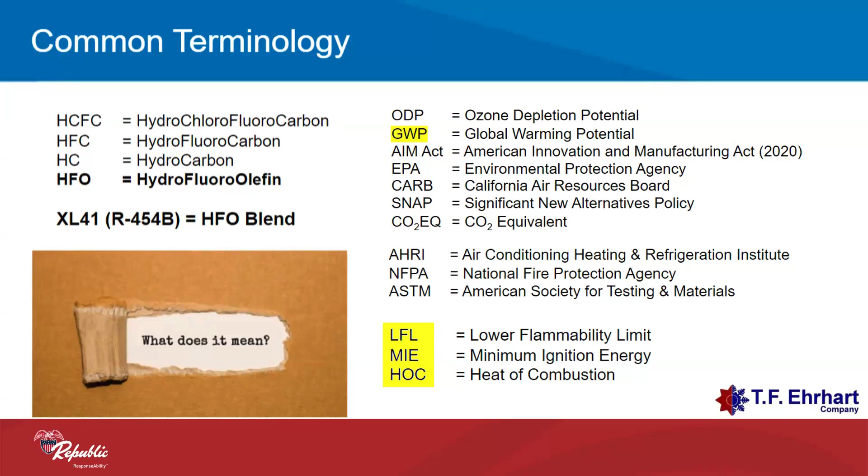But the global warming potential is what we need to keep talking about, and we'll talk about ozone depletion in a minute. But the other three down there at the bottom right, lower flammability limit, minimum ignition energy, and heat of combustion, are pretty important factors. We'll talk in more detail in a minute about those three. But those are the three factors that we really look at in terms of how flammable our low flammable refrigerants, or A2Ls, are. And I'll share with you some of those numbers, and that it's going to be more of a factor as we move forward here.

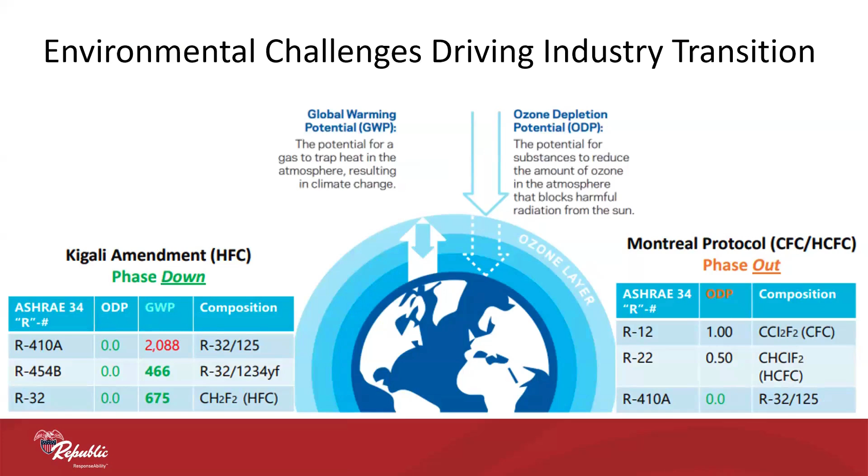So back in the 90s, we brought on 410A to reduce ozone depletion, or ODP. That's why we got into 410A to begin with. And good news is the ozone layer is doing much better now. So we solved that problem, but we increased another problem, and that's global warming. And as you can see, 410A has a global warming potential of 2088. And essentially what that means is putting more carbon into the atmosphere, and that carbon takes a long time to break down. And if you put that into years, well, I'll show you a slide in a minute that goes through that. But what we're doing is three different phases.

First is bulk phase down. So we're reducing the amount of 410A that we're making. Technology transition just happened. Manufacturers, as of January 1, cannot make residential light commercial AC and heat pumps or chillers as of January 2025. So we now have to start making them with the lower GWP products. VRF has another year on top of that. So we are a little easier on the VRF side, but everything else is now being manufactured with 454B refrigerant in terms of JCI and Bosch products.

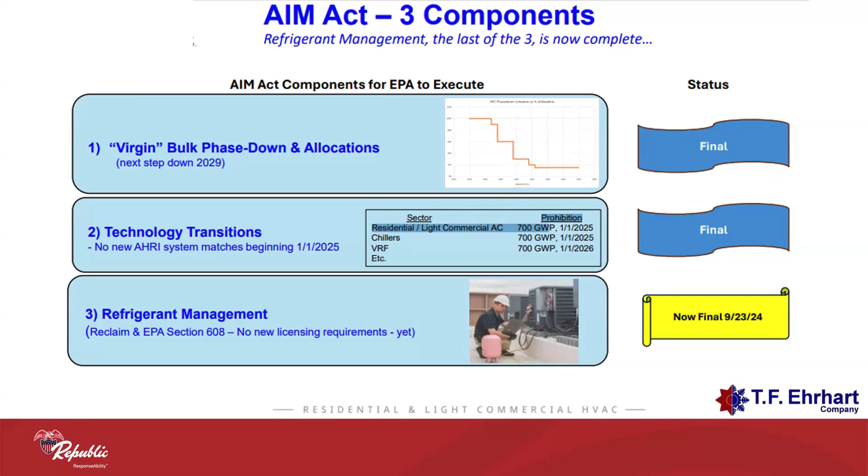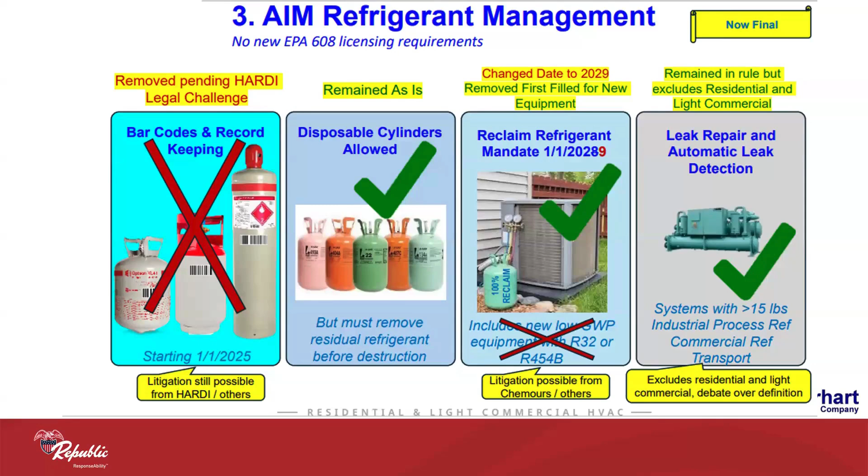Refrigerant management. That's now final, and you shouldn't see any major changes in that for a few years, but the policy is now final. So we're not going to go into great detail now, but as we get closer to it, we'll talk about what that means. The barcoding and record keeping isn't going to happen. We were able to fight that in Congress and got that down. Disposable cylinders will still be allowed. The reclaim mandate's been pushed out to 2029, so that one's a little more clear and still not quite done. And then leak repair detection is coming as well.

Storing in vans for non-refillable cylinders: disposable or non-refillable cylinders, angled like this with the pressure valve facing up, is fine. Again, the pressure valves in the old 410A systems were burst valves, so they just burst and release the pressure and you didn't have anything else happen. These valves just burp the refrigerant out slowly to equalize the pressure. And if they're facing down, they're going to burp the liquid out. And the flammable liquid in your van is not a good thing. So if you store them upright like this, there's always a little vapor section at the top, and it will burp that vapor, so you don't have the liquid refrigerant.

The recovery cylinders, on the other hand, have a valve right in the center at the top, so it's almost impossible to ensure that you don't have some liquid resting upon that valve. So those do need to be stored upright. Of course, if they're empty, they could be stored otherwise, but like anything else in a service van, it's best to have a plan and always have everything in its place when you're moving. So I'd recommend figuring out how you're going to store those upright.

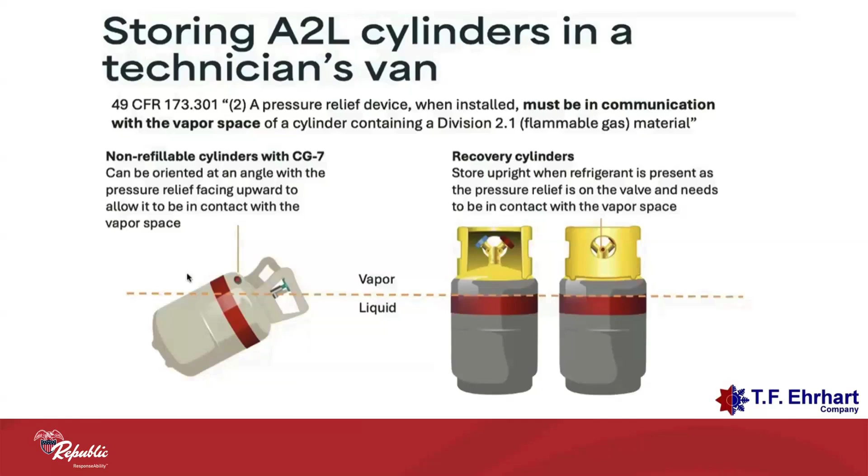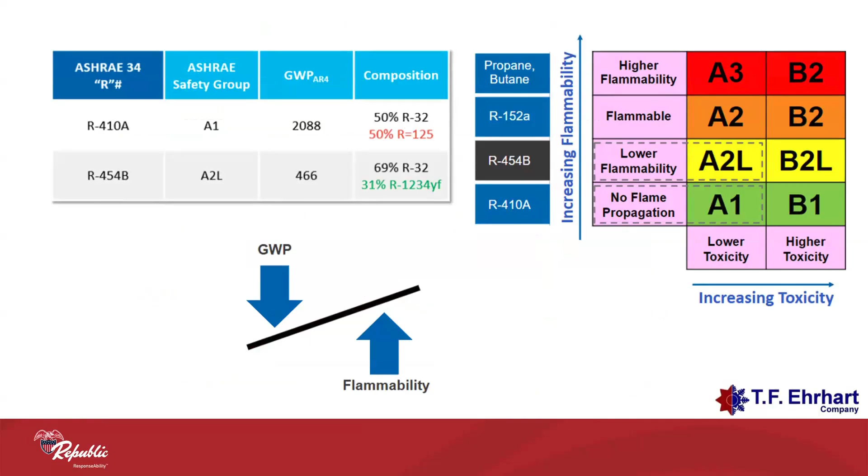Flammability, again, A2L, lower flammability and non-toxic. I'm not going to spend a lot of time on this. I think everyone's heard that. And we're not changing the toxicity of any of our refrigerants. We're just going to that low flammability range.

I talked about how long it takes for refrigerants to break down in the atmosphere. 22 is about 13 years before it breaks down. 410A was 30. So it takes a long time for those carbon atoms to break down. So relative to a normal carbon atom, it's significantly longer.

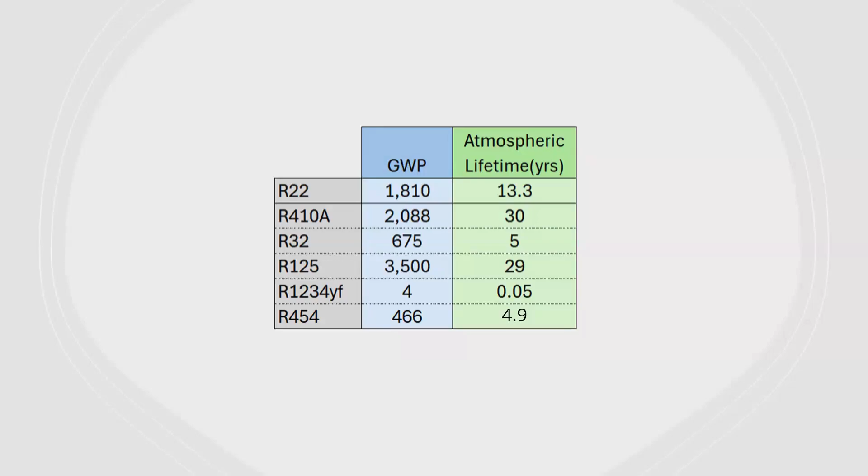Some of the other refrigerants, R454B is a combination of 32 and R1234YF. And you can see that 1234YF is a very short time. It's actually a couple of weeks before it breaks down. So the R454B is about 4.9 years, so significantly better than 410A. So less damage to the atmosphere and a good thing, but certainly the flammability changes how we look at things.

I talked about the lower flammability limit, minimum ignition, and burning velocity. Lower flammability limit means how much do you have to have in a cubic meter, or think of a cubic yard, a 3 foot by 3 foot by 3 foot cube. How much do you need to have to start a fire? And for the 454B, it's almost the equivalent of a soda can or a beer can, if you will. 12 ounces is pretty close.

For propane, it's 2 tablespoons. So a much, much lower amount of refrigerant needed with propane to get things fired up. It takes quite a bit to get the 454 started. Minimum ignition is how much energy does it need to actually get a spark? And for 454B, think of the spark plug for a Shelby Mustang. That's about the energy it puts out, about 100 millijoules.

For propane, I'm not certain, but I think my wife gives me looks that have more energy than that, 0.25 millijoules. But it doesn't take much of a spark is the point to get that started. And burning velocity is how fast it moves. And centimeters per second is a hard thing to imagine, but 5.2 is pretty slow. So it's not necessarily moving fast enough to catch other things on fire, whereas the propane is moving very quickly.

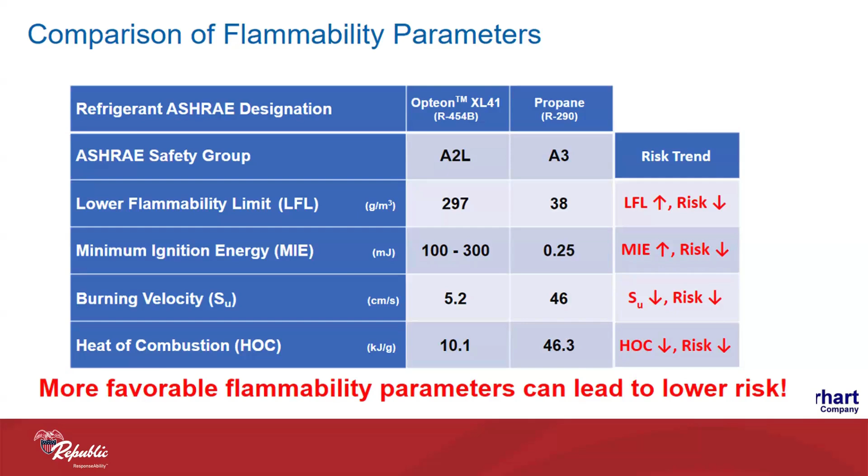Here's the flame testing and what makes it a class 1 versus a class 2. You can see that little edge that's sticking out of that V there is how they test it. And if that refrigerant burns outside of that 90-degree V, then it's a class 2L as opposed to a class 1. So that's the testing that takes place. So very low flammability in reality, but it is a little bit more flammable than past refrigerants.

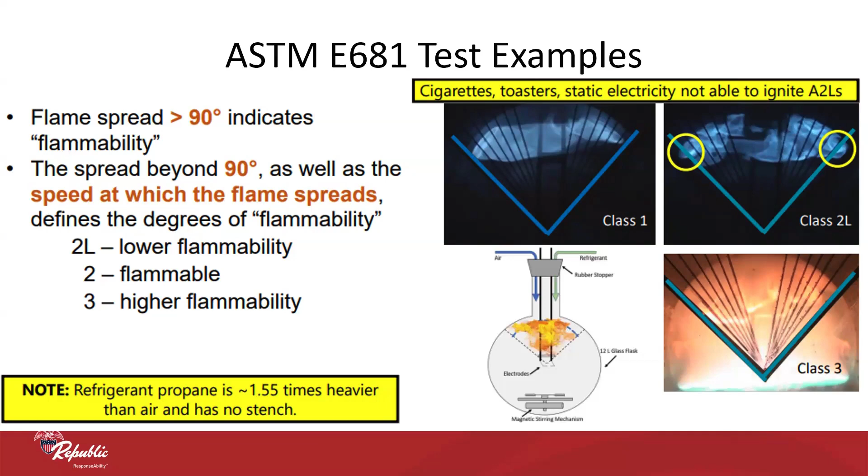Another important note is the refrigerant does not have an odor added to it. So it's not something you're going to smell necessarily. So other testing methods need to take place other than the good old nose.

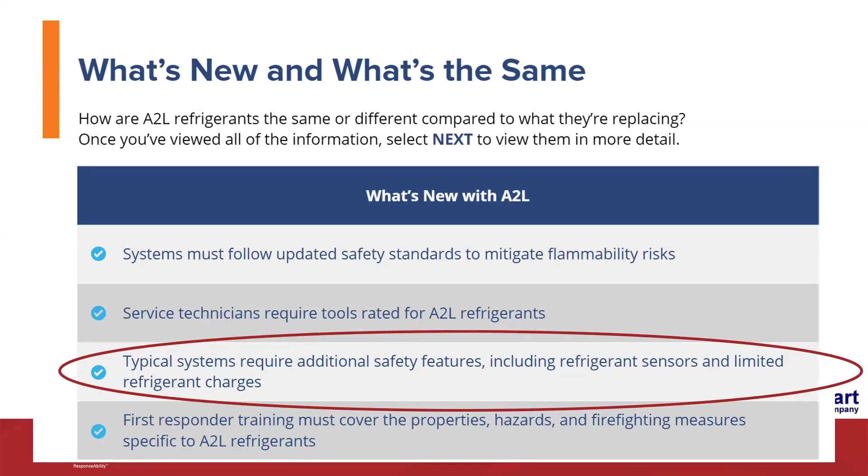What's new? What's the same? Flammability risks certainly have to follow those standards. Some of the service tech's tools need to be updated. Most have already been. My guess is you'll have very few that aren't already ready because we've been making that change for a while. The third one there, though, is a little more important, the refrigerant sensors in the system, and those we'll talk about a little bit more. And first responder training must take that into effect as well, and we've been talking to fire marshals about that.

So it all comes down to concentration, and this is not unlike other refrigerants. If you put too much 410A into a given room, it will slowly build up on the floor and force the oxygen up. So if someone's sleeping in a room and 410A floods that room, it could force all the oxygen up and suffocate some people, which has happened. But A2L changes that risk, and now you have a suffocation and a fire risk.

So we look at this home, and it's about an 800 square foot home, maybe 1,000. And this room is 135 square feet.

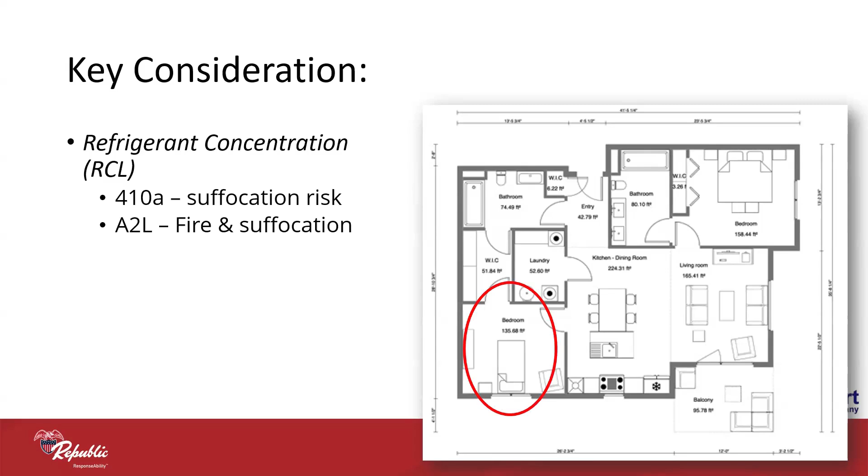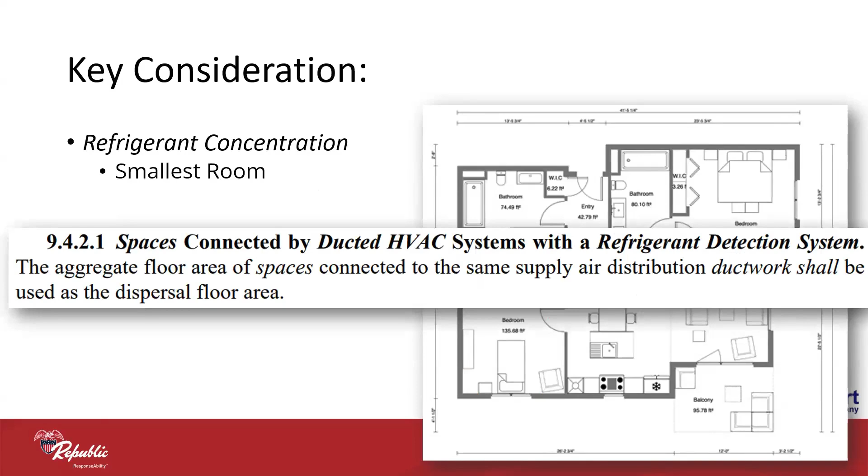The detection systems become a factor. If you do have a refrigerant detection system, you use the entire square footage of the home because it will turn on the circulation fan and distribute that refrigerant across the entire home and reduce that risk of fire or suffocation. If you don't have one, you have to take the smallest room.

So if we take that 135 square foot room, we can have a refrigeration system that has 4.3 pounds of refrigerant. This is according to ASHRAE 15.2. So most of us would agree that this home is going to need at least a 2-ton and probably 2.5. If that's the case, we don't make refrigerant systems that can do 2 tons or 2.5 tons with just 4.3 pounds of refrigerant. But if we do have the detection system, an 800 square foot home can have 27 pounds of refrigerant in it. So as you can see, that refrigerant detection system becomes pretty important for the safety and for regulation purposes.

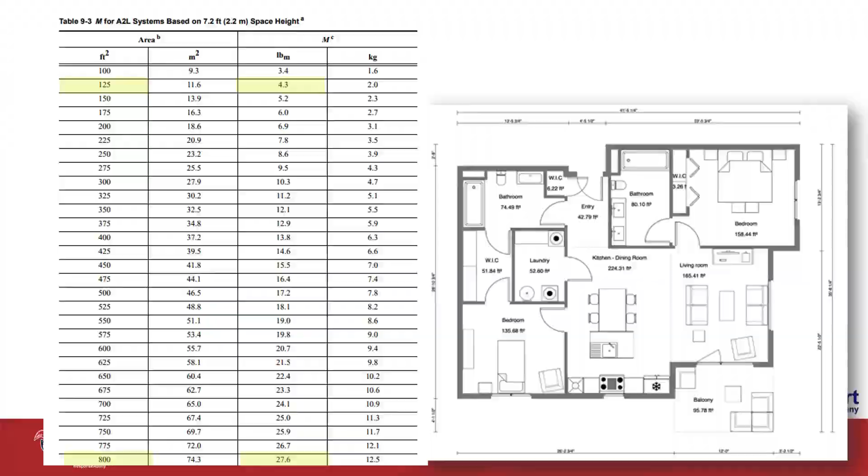So a refrigerant detection system, according to ASHRAE 15.2, must be tested at installation. And we strongly recommend this, finding a way to test and document it, so if anybody ever comes back at you, you have some historical documentation. It needs to energize the blower for circulation, and the manufacturers are doing that. It also says in 15.2 that it should activate required mechanical ventilation.

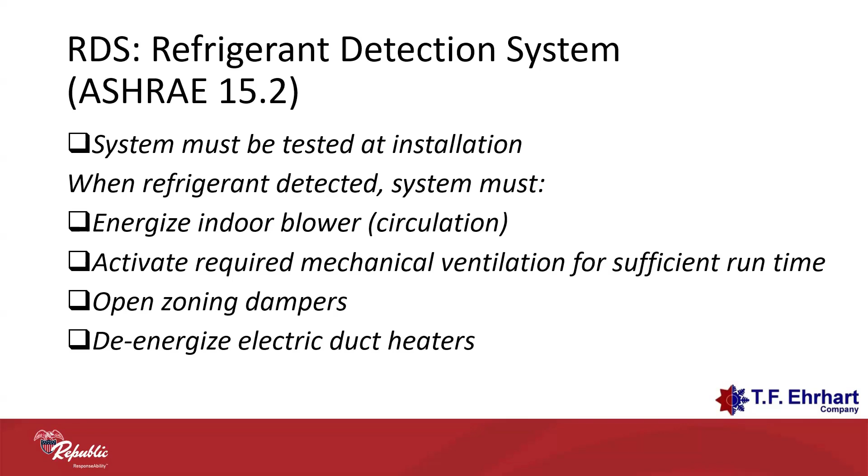Most manufacturers have not added this to their refrigerant detection system, so it's important to check with your local code enforcer to see what they're going to do locally. I don't think most will worry about the ventilation if you have the circulation, but it's important to check because you don't want to be on the wrong side of that inspection. It should open any zoning dampers so you're getting full circulation. And of course, if there's any electric heaters in the duct, we need those to shut off because that's certainly a place where ignition could happen.

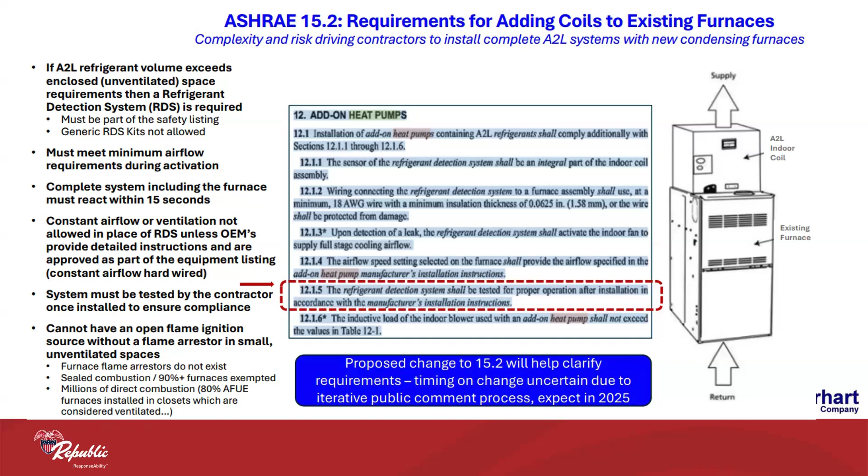This is the guidelines for adding a coil to an existing furnace. And again, I just wanted to call out, manufacturers are going to have good instructions on this, and JCI does, and Bosch also does. But you want to make sure that the refrigerant detection system is tested. Find out what the requirements are and go through that test procedure and document it on your installation documentation. And worst case scenario, if there ever is a fire, you want to have that documentation proving that that testing was done.

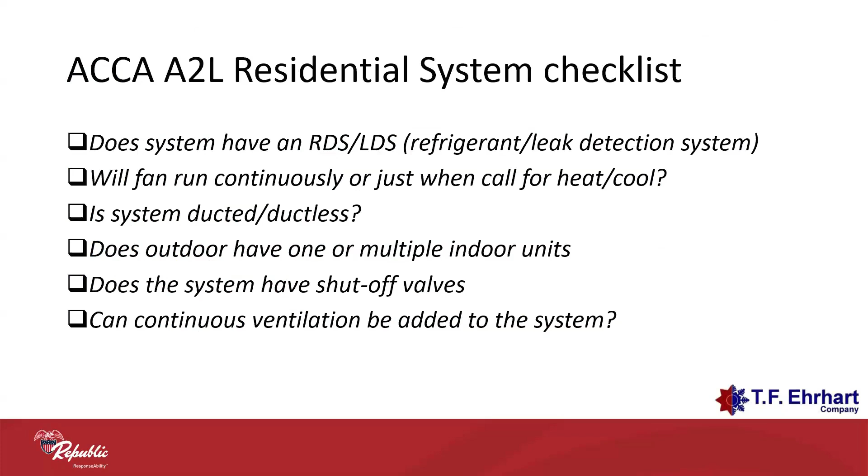Residential checklist. This is from the ACCA training. Does the system have an RDS or LDS, leak detection refrigerant detection system? Will the fan run continuously or just on the call for heat? Is the system ducted or ductless? Does it have one or multiple indoor units? Does the system have shutoff valves? A little bit more for commercial, but good to know. And then finally, can continuous ventilation be added to the system? So a lot of different options there. Good thing to have in your checklist just to make sure your records are showing the right information.

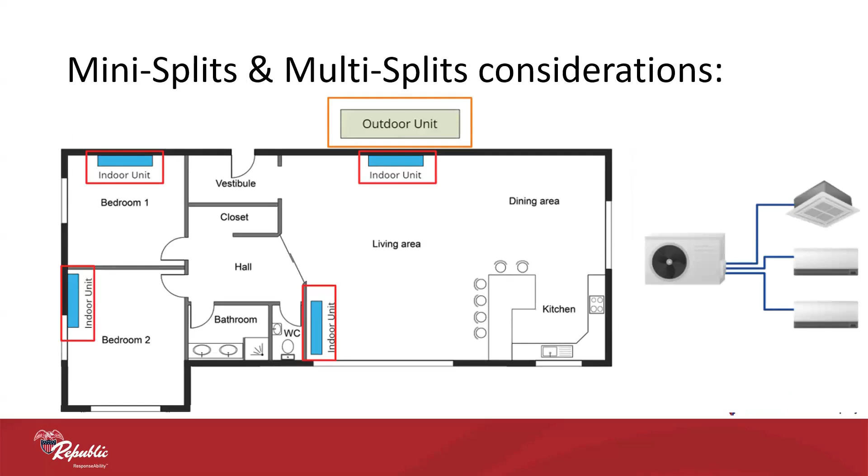I call this up only because in the scenario where you're using a multi-headed ductless system, that system in this application probably is a 2.5 or 3-ton system. And if you have an indoor unit in bedroom 2 there, chances are good all that refrigerant could dump into that room. So make sure you're following manufacturer guidelines on how to manage and mitigate that risk.

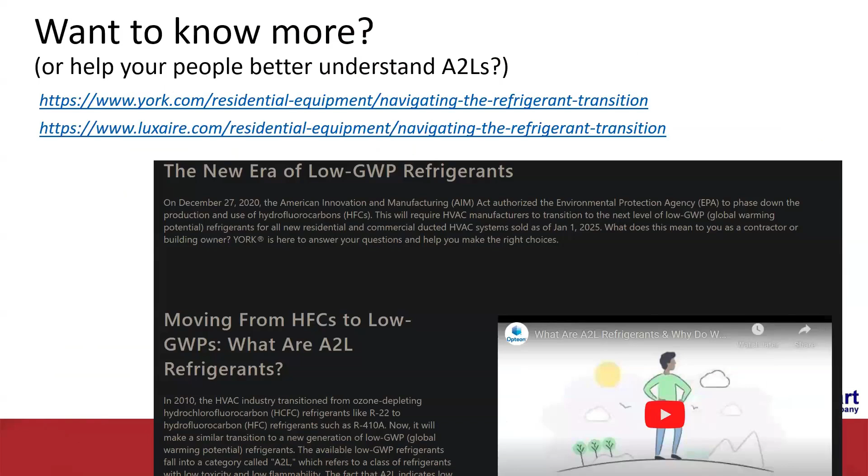Additional resources always available: the IRA Toolkit, the 454B white papers, the EPA Data Hub. Those links will be in the PDFs we send out, so feel free to take advantage of those. Some good videos online, the York and Luxaire websites that we recommend, talk about low GWP refrigerants and what that means. So take advantage of that, and absolutely join us again.